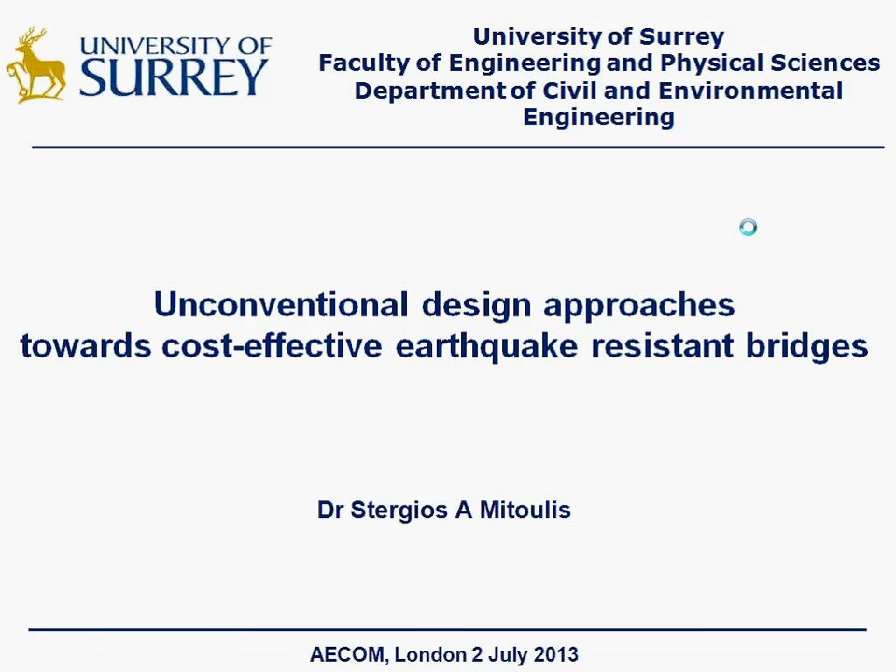Bridges are vital parts of the lifeline system, and they should maintain emergency mobility and accessibility not only in normal circumstances, but also even after severe earthquakes. Imagine what would happen if a bridge would collapse after an earthquake and ambulances don't have access to the hospitals.

Infrastructure woes take a toll on the U.S. economy. This is a Reuters article published a couple of years ago, showing the toll placed on the U.S. economy due to deficient bridges, which is a $2.7 trillion problem. In 2010, the American Society of Civil Engineers showed that deficient and deteriorating transportation systems and bridges drained $90 billion from the economy in 2010 alone.

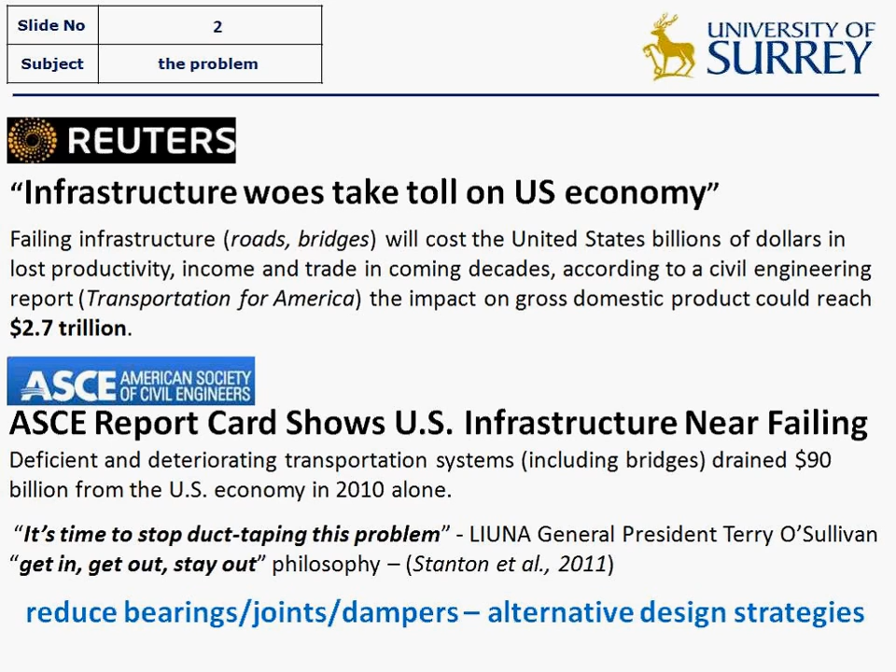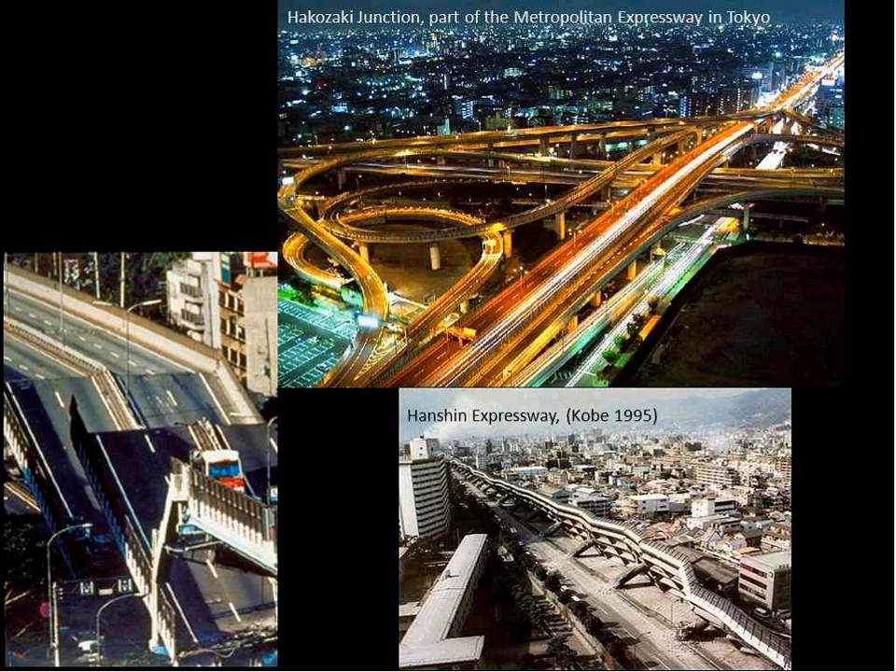You can see on the top figure the healthy system of the Hakozaki junction. On the left you can see a bridge that has experienced span unseating. On the right, one of the most famous bridge failures, the Hanshin Expressway, which totally collapsed during the 1995 Kobe earthquake.

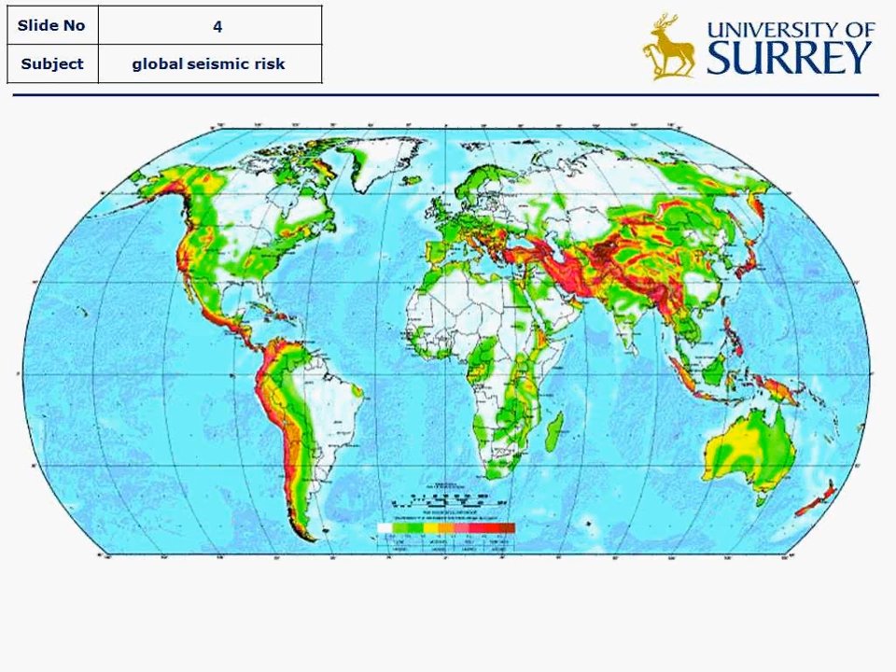causing dramatic disruptions of traffic and actually dividing the city into two isolated areas after the earthquake. This global seismic risk map shows in red the areas that experience large seismic actions. You can see this on the west side of America, in Arab countries, Southern Europe mostly, and in Southeast Asia. So what exactly is the seismic action?

Why do we have to address seismic issues in bridge design? The action is a horizontal load. In fact, it is an acceleration imposed on the structure, and this acceleration is translated into inertial loads, so the structure produces the seismic loads and loads itself by inertial loads.

This is the seismic action, which would not be dangerous at all if we didn't have constructed environments like bridges and buildings. So seismic design is required for structural design in modern building codes such as Eurocode 8, such as AASHTO that is applied in America, and Caltrans in California.

Bridges are nearly isostatic systems having low redundancy, which means that one failure may lead to collapse. Seismic events can cause catastrophic failures, endanger public safety, and have tremendous impact on economies. I showed before the collapse of the Hanshin Expressway, which is related to the impact on the economy.

Bridges are vital parts of the lifeline system that should maintain emergency mobility and accessibility even after severe circumstances such as floods, earthquakes, and extreme wind effects.

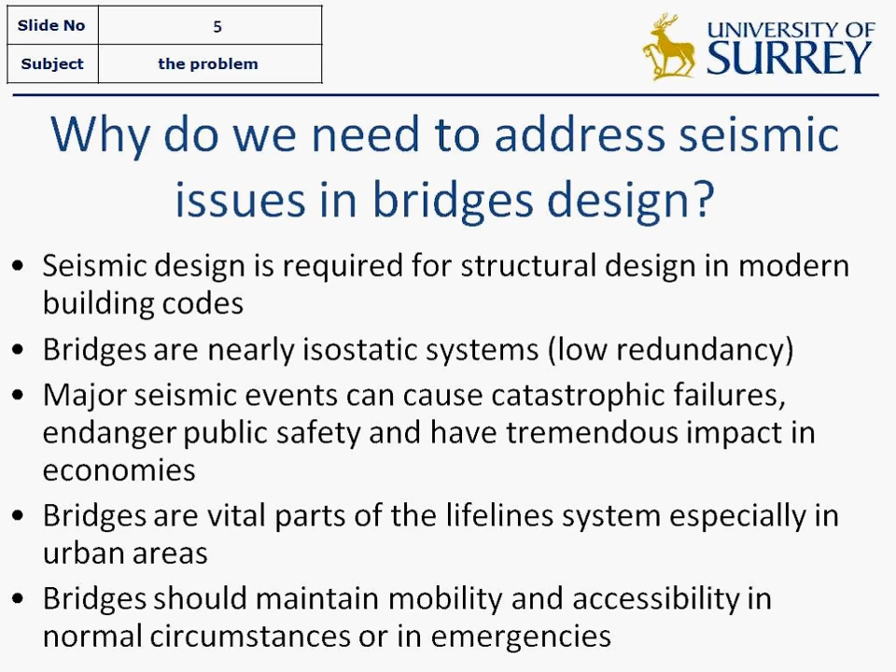So that you are acquainted with this project, this is AECOM's project in Hong Kong, built in 2010. There are many different design concepts that the bridge engineer may use when facing the problem of seismic design of bridges. In this case, seismic isolation was used, meaning the deck is supported on the piers and bearings through isolation devices and slides during thermal movements onto the piers.

The bearings receive this serviceability movement, and as such, the piers are not really loaded during the serviceability limit state of the bridge. During a quake, these devices again receive the large seismic movements and do not transmit seismic loads to the piers. But there are many different design concepts that an engineer may adopt to design a bridge against earthquakes.

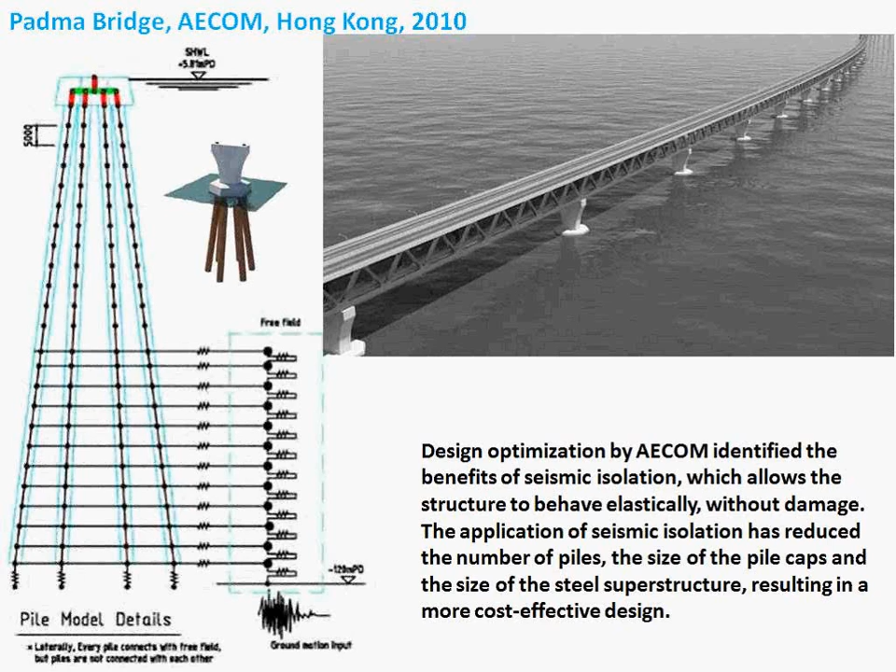So let's take the concept design of bridges against earthquakes from the beginning. You can see the structural elements of the bridge, the deck and the substructures. The substructures consist of bearings, piers, foundations, and abutments. I have divided this slide into three specific parts.

The first part is the structural elements. The second part, with the gray zones, are the design issues. And the third part is the seismic design considerations, I would say. So the deck design is usually based on construction methods.

The selection of the cross-section has to do with serviceability and prestressing, not influenced by seismic actions. We have published research in the past showing that, in fact, the deck is not affected by seismic actions, not even in bridges with rigid pier-to-deck connections.

While at the same time, bearings, one of the most important structural elements of earthquake-resistant bridges, since a bridge relies heavily on their seismic performance. At the time, we have many different types of bearings.

There are many companies producing bearings, and in most cases, application and industrial innovation went further than codes and theory. So we have to decide, when we design a bridge, about the right bearings and the correct use of isolation.

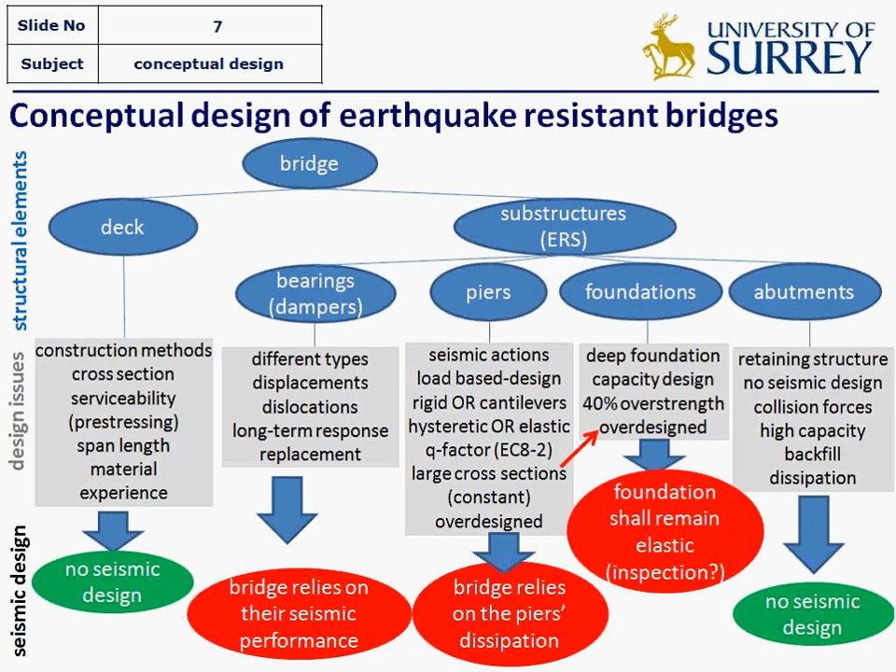So this is the initial concept. When we design a bridge, we have to have the seismic actions lower than the resistances. Bridge engineers utilize isolation devices such as viscous dampers or bearings. The damper dissipates energy through viscous behavior, and bearings dissipate energy through hysteretic behavior. We can increase the resistance, but at the same time we increase the stiffness of the bridge, which doesn't necessarily make the bridge safer than the previous design concept.

This is not straightforward in structures under dynamic loading, because the reduction in the period may cause us to attract larger seismic loads. This can also probably apply to bridges under wind effect, under wind loading.

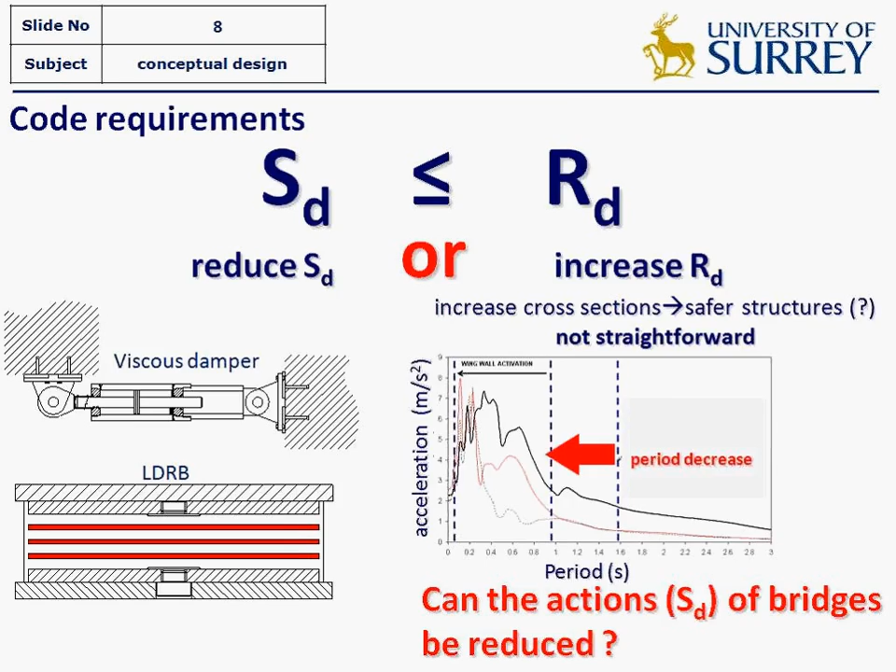The idea of isolating a bridge against seismic loads seems to be very good actually. It provides flexibility to the structure. The initial structure without isolation would have higher inertial loads from the loading. If you use isolation, the system becomes much more flexible, and the isolation reduces inertial loads rapidly. This is a great idea.

At the same time, we may also utilize bearings with high capacity, having high damping properties, high capabilities, to even further reduce the seismic load. Yes, this is a very good idea. Bearings reduce the serviceability loading of the piers, reduce the seismic loading, and increase damping. But...

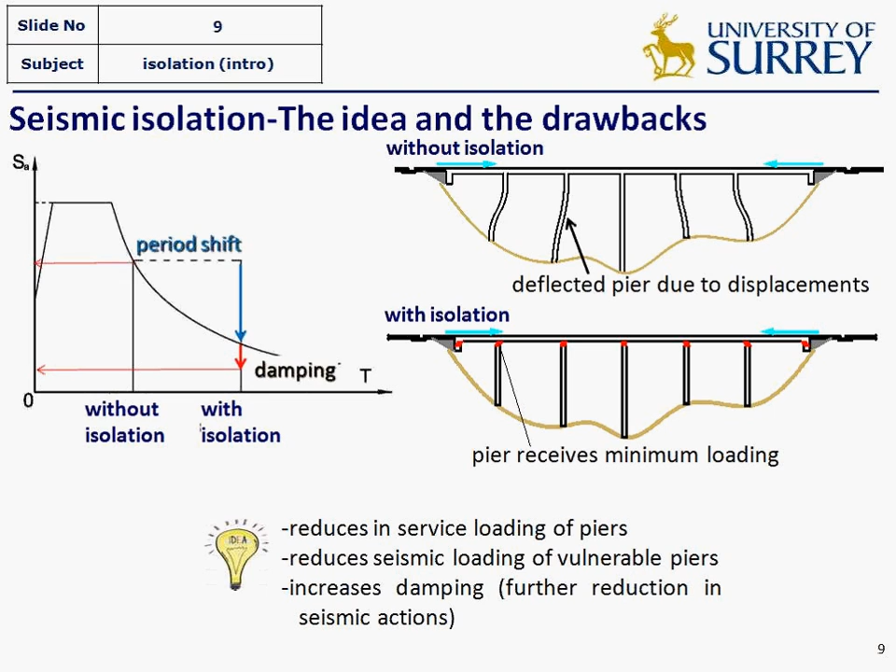A past earthquake showed that actually that was not a really good idea, because many bridges failed during the 2011 Great Tohoku earthquake in Japan. Many bearings were found to have ruptured completely through the elastomer, due to direct tension. So what happened there?

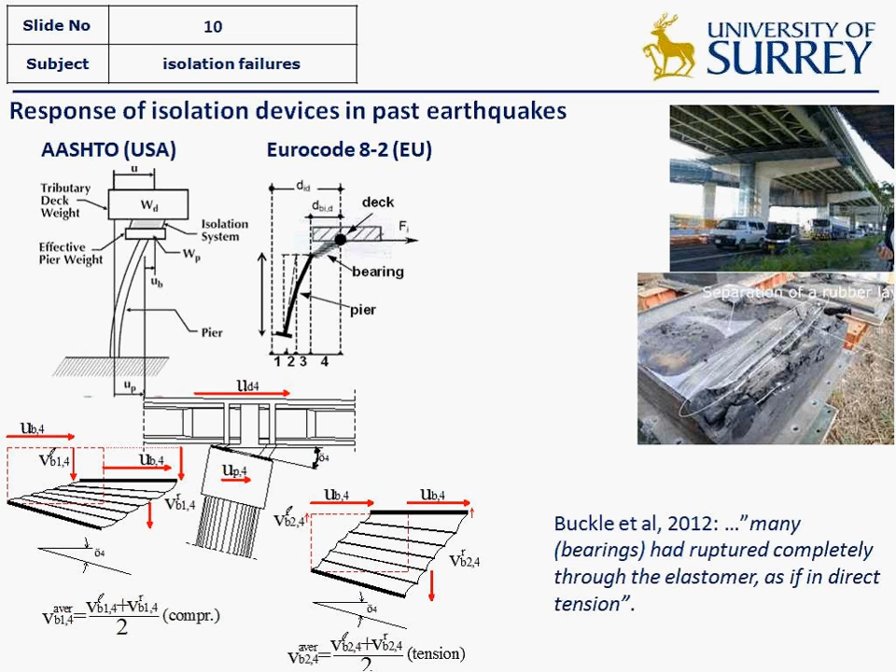A recent publication of mine in a journal showed that if we use double lines of bearings on top of the pier caps, the bearings have to receive a tensile movement. Bearings are not designed against tensile movements, they're not designed against tensile loads. So these bearings failed, and many bridges experienced span collapses.

If we think in terms of serviceability of bridges, we will see that the bearings do need replacement after some years of bridge service. An isolated bridge responds with increased displacement since it's quite flexible. And of course, isolated bridges are statically determinate bridges, and failure may lead to collapses.

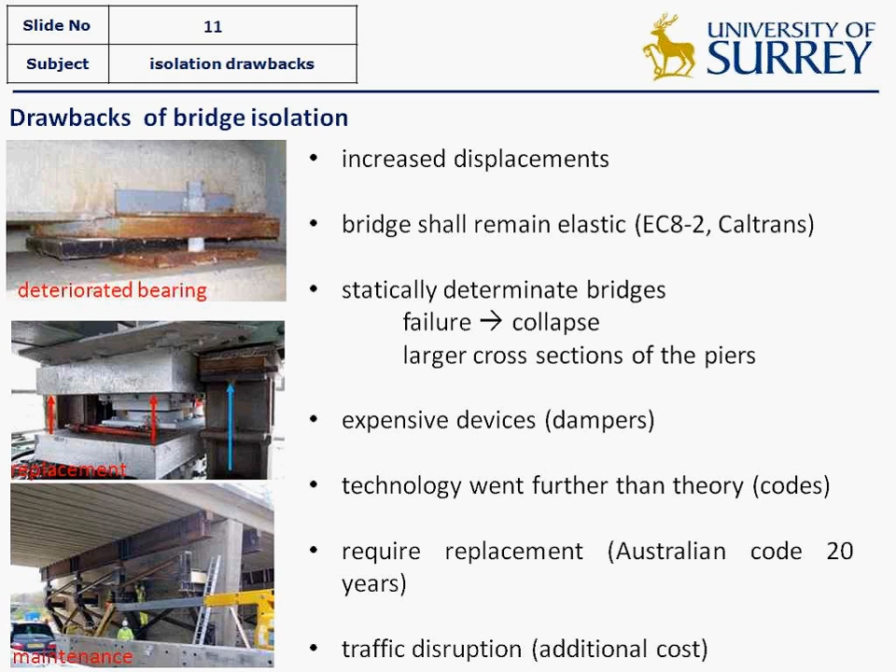These are expensive devices. Bearings are sold at very high prices because they also sell the knowledge and the experiments done in order to produce such bearings. And of course, technology went further. Design codes provide some checks against elastomeric bearings and sliding bearings, whereas at the same time the market can provide us with a few hundred different types of bearings.

So the question is, do expansion joints cause more problems than they solve?

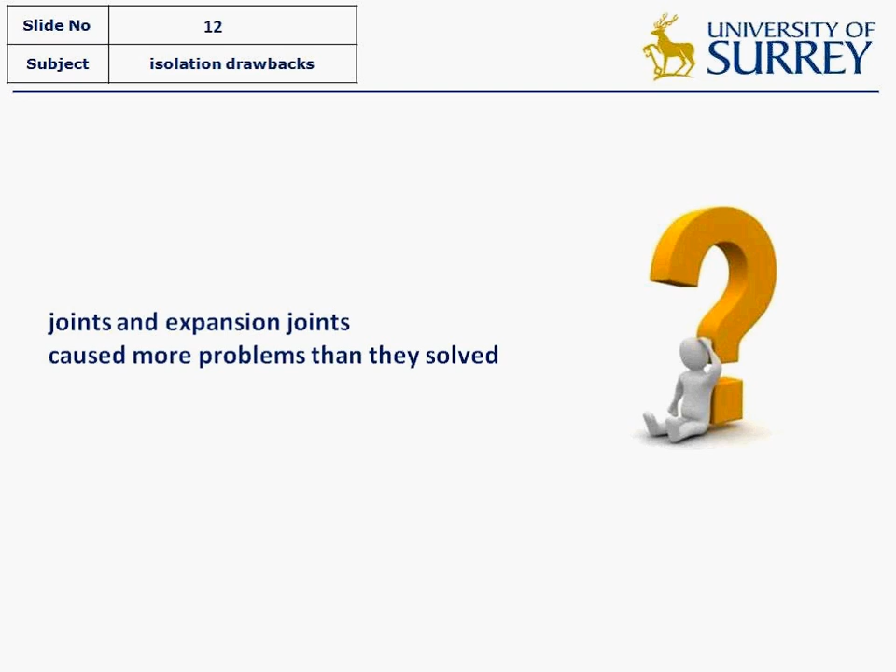Something like 10 years ago, I made a turn to the unconventional bridge design concept, and I tried to utilize earthquake-resistant abutments - elements which were not supposed to be effective and active during earthquakes. So this is the idea.

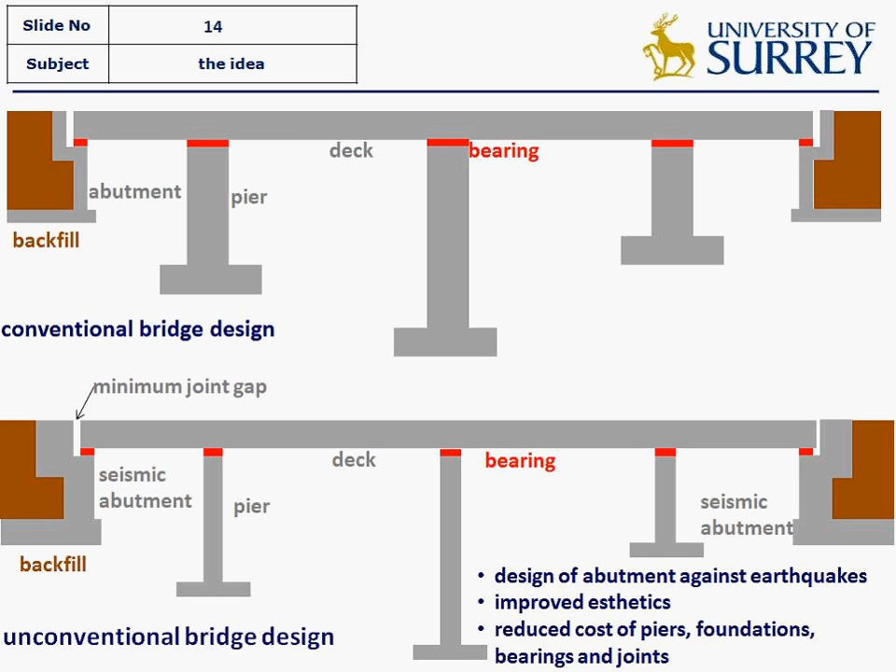This is the conventional bridge: large pier sections, large foundations, and one abutment that is in fact only retaining the backfill soil. The idea that was proposed and published several times in journals was to provide high capacity external support, horizontal support, like this abutment, and effectively reduce the pier section, the foundation design, and of course reduce the use of bearings.

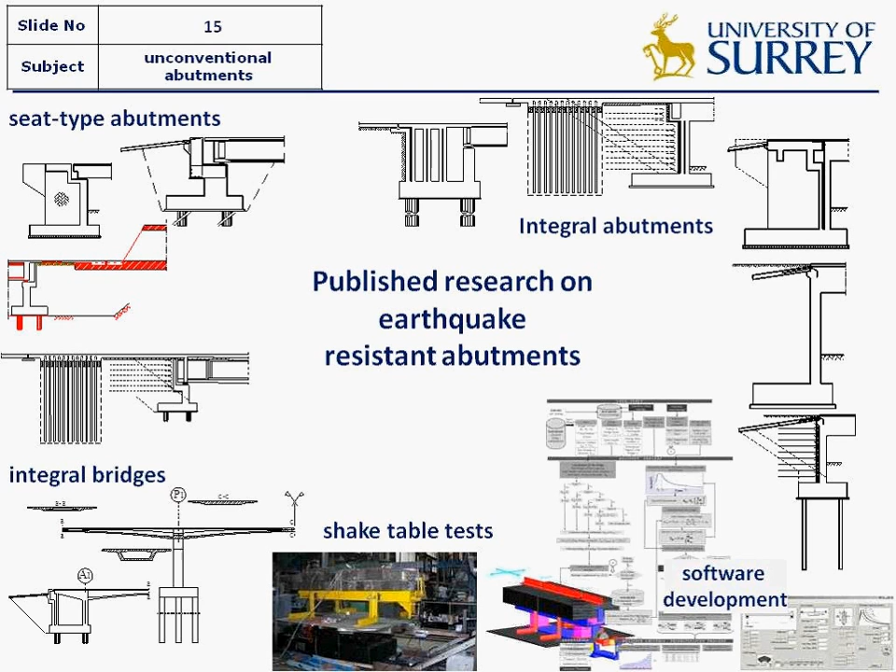So how are abutments being treated in Eurocode or in other American codes like AASHTO? If we use a seat-type abutment, then the abutments are not considered to contribute to the seismic action. If we use integral abutment, Eurocode 8 Part 2 requires that the behavior factor Q equals 1.5 shall be used. This behavior factor, which corresponds to the American R factor, shows how much of the induced seismic energy can be dissipated by concrete sections, by the piers.

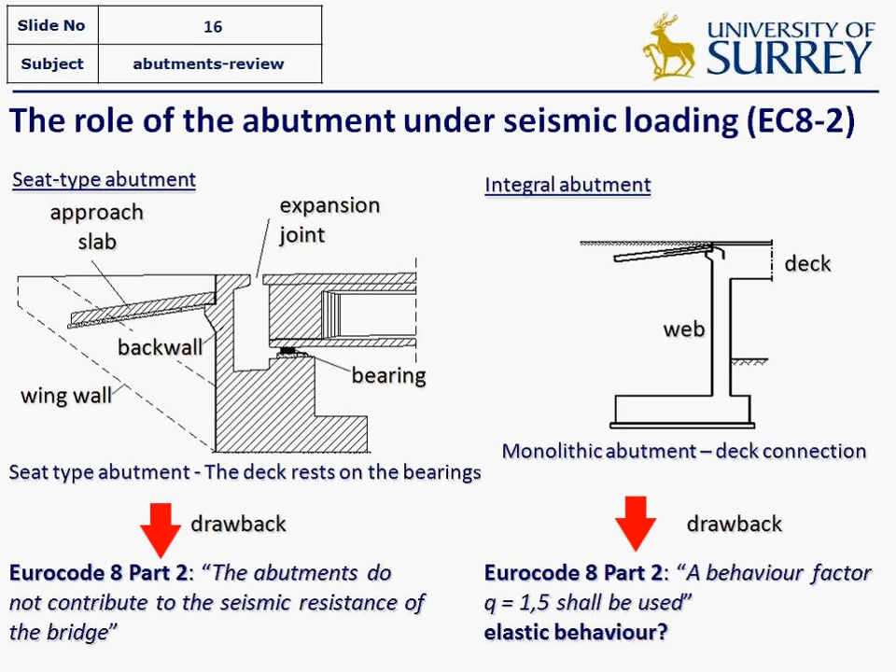So if that factor is close to 1, that means that the structure shall remain elastic. So we use integral abutment bridges. If we design integral abutment bridges, the bridge shall remain elastic, even though the piers are connected rigidly to the deck. This is the philosophy. They utilize either integral abutments, and Caltrans provides an equation for the calculation of the

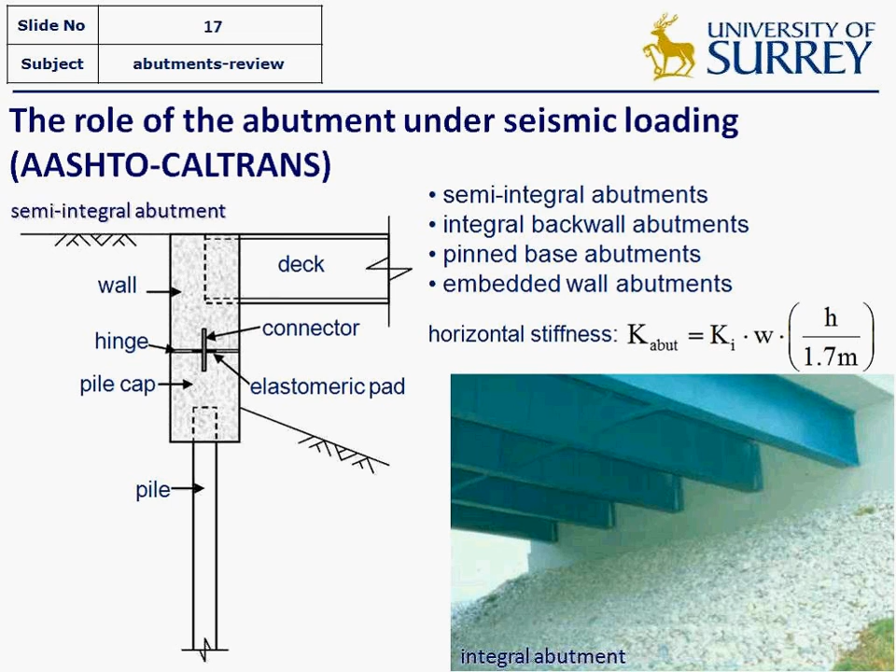horizontal stiffness of the abutment plus the backfill soil. And there have been quite a few studies on the semi-integral abutment concept, which is a stub-type abutment that is connected through a connector, which is in fact a hinge, to the pile cap and the piles, and this hinge in fact reduces effectively the bending moments of the piles, so piles are not susceptible to fatigue loads, mostly to fatigue loads like bending loads and constrained movements and constrained shear stresses.

What is the requirement of Eurocode for the expansion joints? This is the expansion joint, the gap between the deck and the back wall. This wall is called back wall. This expansion joint has to take into account, of course, permanent movements due to creep, and has to take into account 50%, this is 0.5 according to Eurocode 1, multiplied by the gradient of the uniform temperature gradient.

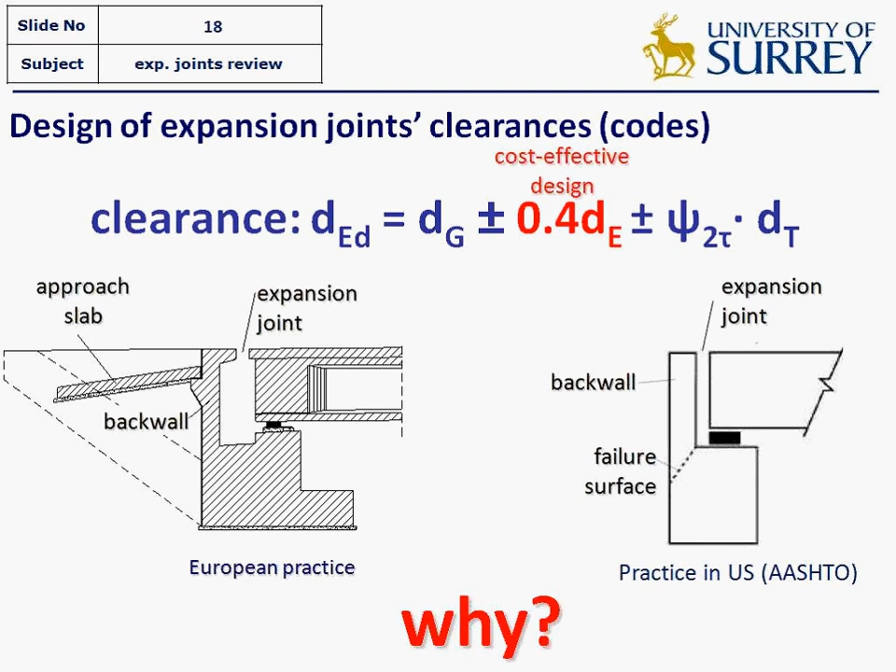This joint also has to take into account 40% of the seismic movement, 40%, and not the whole seismic movement. If we design expansion joints against a total seismic movement, then probably the expansion joint calculation will show that we'll need something like 300 millimeters of expansion joints, which are very, very expensive, and these joints should be replaced several times during the life of the bridge, which means that the cost of the bridge will be increased rapidly due to the need for replacement of these devices.

So the result of the poor design, 1990 Costa Rica earthquake: the deck pounded on the abutment, no provision for this collision effect was taken into account during the design, and so we had a tremendously rotated abutment, which of course cannot be retrofitted, and there are some slight damages in past earthquakes from pounding-induced failure of the expansion joints. You can see here that the bridge might allow traffic access, but the expansion joints would not allow emergency vehicles onto the bridge.

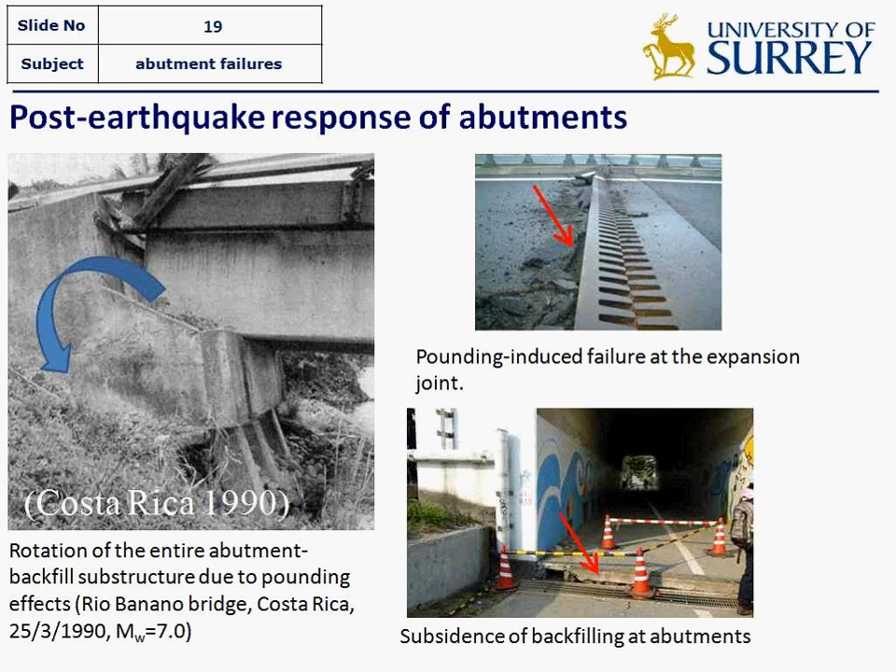Can these effects be modeled in practice with finite element software? You can see here that of course we can model such effects. For example, this is a Plaxis model that was modeling such pounding force on an abutment with surface foundation. The model was verified by the SAP model, this is a SAP 2000 model, a software provided by Berkeley University. The final result for the permanent movement, the residual wall movement, was up to 262 millimeters, which means that the bridge is not accessible.

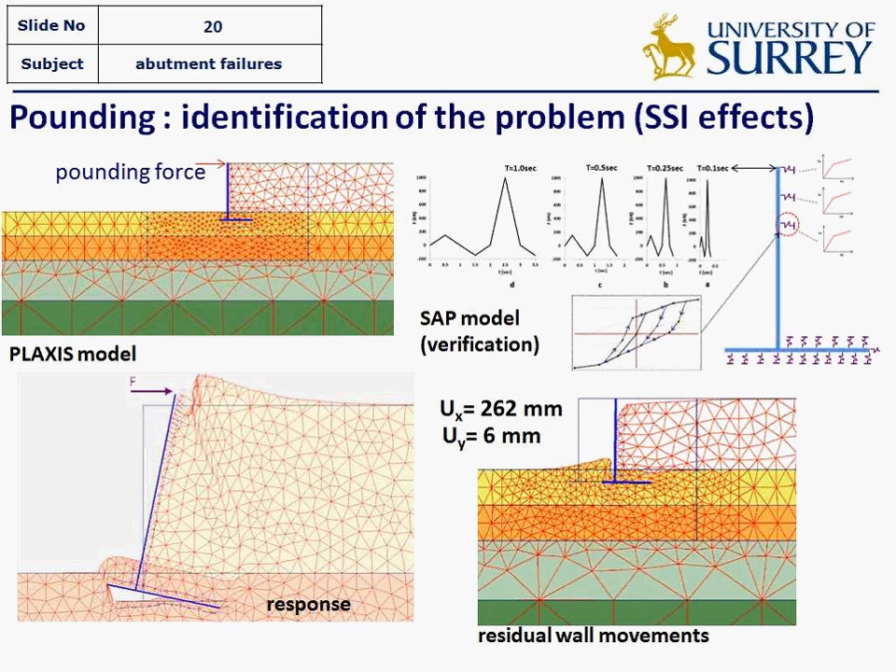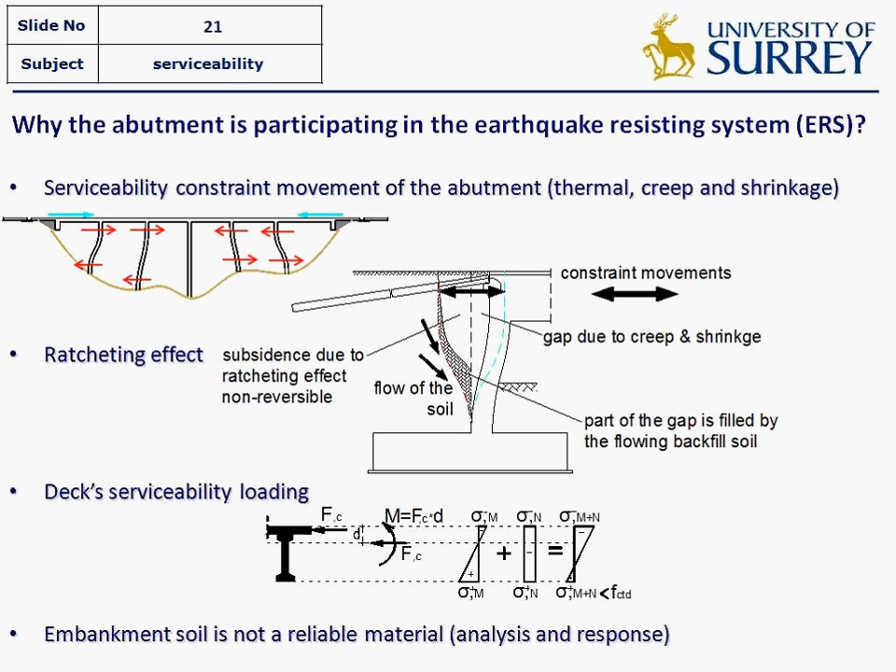So abutment and the backfill soil are not considered in the earthquake-resistant system of the bridge. There are several serviceability related issues, such as the constrained movements of the abutment, the ratcheting effect that has been addressed in the past by Virginia University, and the deck serviceability loading that was published several times by our team back in my previous university, Aristotle University. And of course, the embankment soil is not a reliable material. Who is going to design a bridge relying on the resistance of the backfill soil?

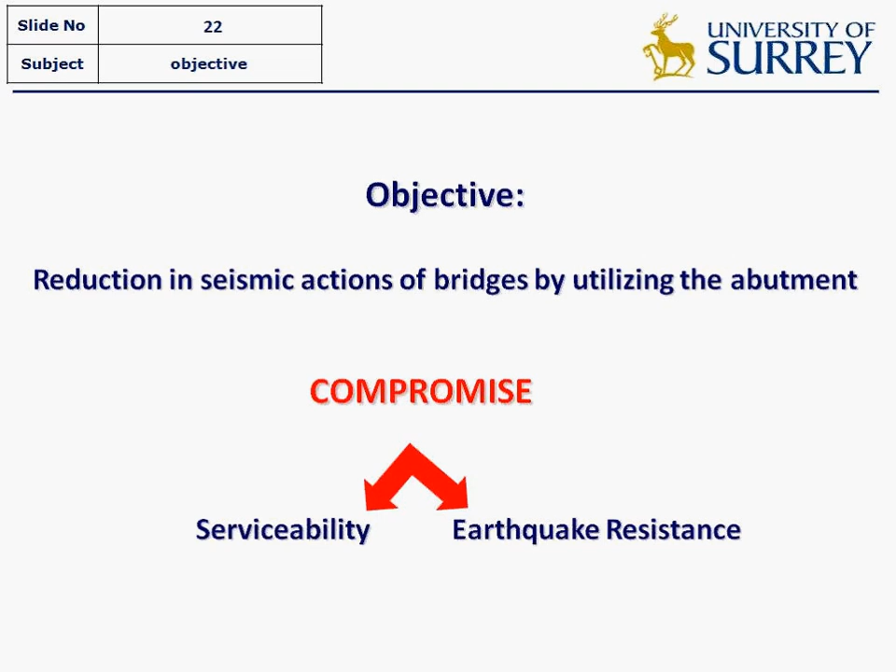The initial thought when designing an earthquake-resistant bridge that will incorporate the abutment and the backfill soil into the lateral resisting system was to compromise between serviceability and earthquake resistance. Serviceability requires flexibility, and earthquake resistance requires high capacity.

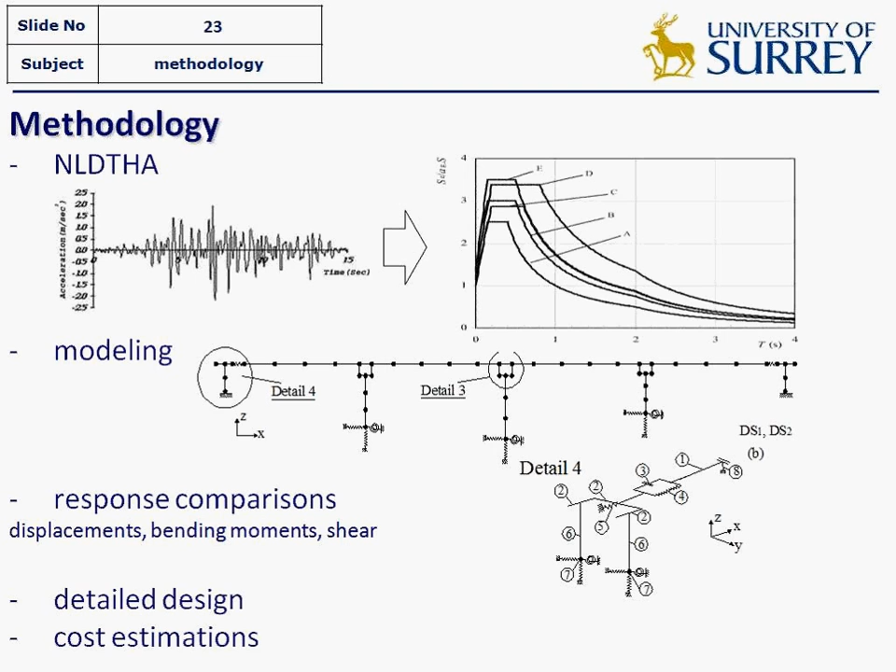The methodology, of course, is the typical methodology for designing and analyzing bridges against earthquakes: non-linear dynamic time history analysis, with accelerograms reduced to Eurocode 8 Part 1 response spectra, detailed modeling of the dynamic system, and comparisons in terms of displacements, bending moments, and shear actions of bridges to see if the new, unconventional concept is efficient.

So it was utilized only the conventional seat-type abutment. Nothing was done differently from the typical design.

Except the expansion joints. The expansion joints in that case did not take into account seismic movements, so the deck was interacting with this abutment. Displacements between the typical case, the bridge with the large expansion joint, and the conventional bridge with a small expansion joint, were compared in terms of deck displacements.

What we found was that when the abutment participates in the earthquake motion, the bending moments may be reduced by up to 25%, which means we can design the piers with smaller cross sections, and we can effectively reduce the cost of both the piers and the foundations.

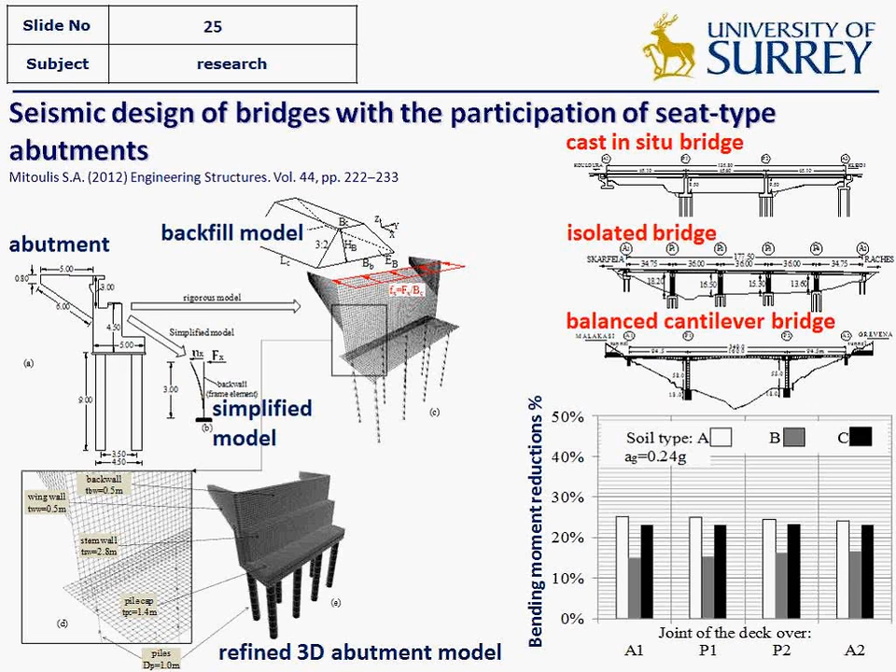We provide an expansion joint between the deck and the back wall, but the magnitude of this gap is much smaller than the typical one that the code requires. So there's an interaction between the deck and the abutment, and further to that, the backfill soil is activated because the back wall moves towards the backfill soil. That was the idea: to involve the abutment into the seismic problem.

Having recognized that displacements and the bending moments of the piers are reduced due to this interaction, the back wall was strengthened. Let's see what happens if the back wall is a high capacity external shear key, a high capacity external support, having a thickness of up to 1 to 1.5 meters.

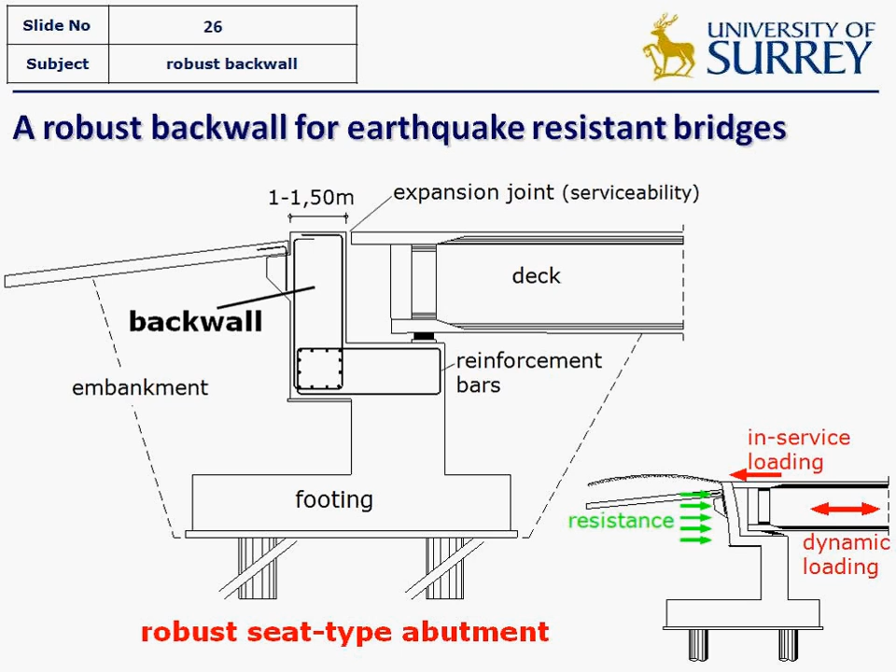So we did some analysis. I'm not going to go through the analysis with MATLAB, but the fact was that the displacements were further reduced, up to 40%.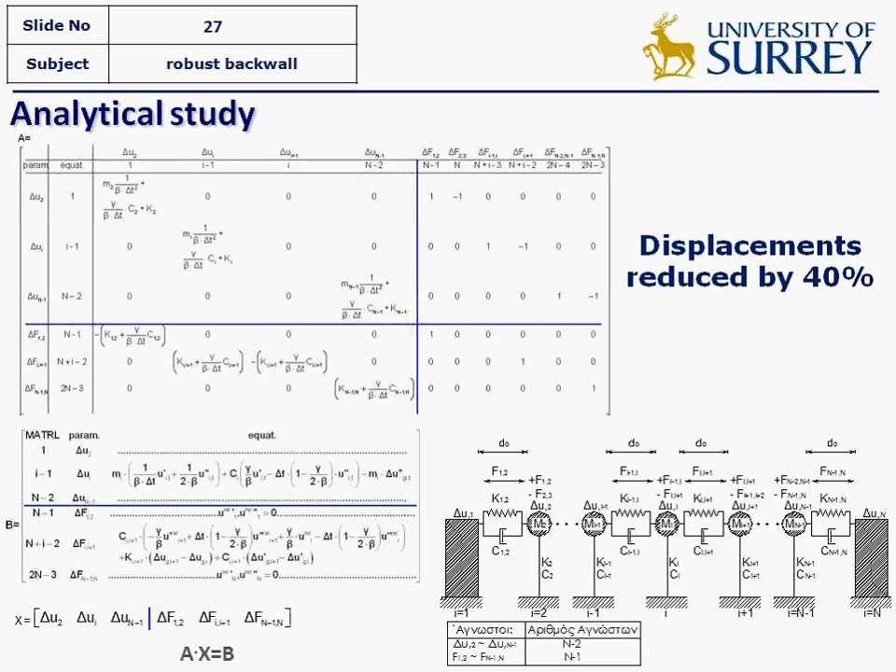Then we shed more light on the unexploited process of the backfill soil, and we extended the deck slab of the bridge towards the backfill soil. What was done after that was to restrain this slab, this continuity slab, into the backfill soil.

These piles combine flexibility with earthquake resistance. Why? Because the piles have quite small cross sections, so they are quite flexible, and at the same time we can also utilize expanded polystyrene layers just below the pile cap of the piles in order to increase flexibility of the piles to receive serviceability movements due to thermal effects.

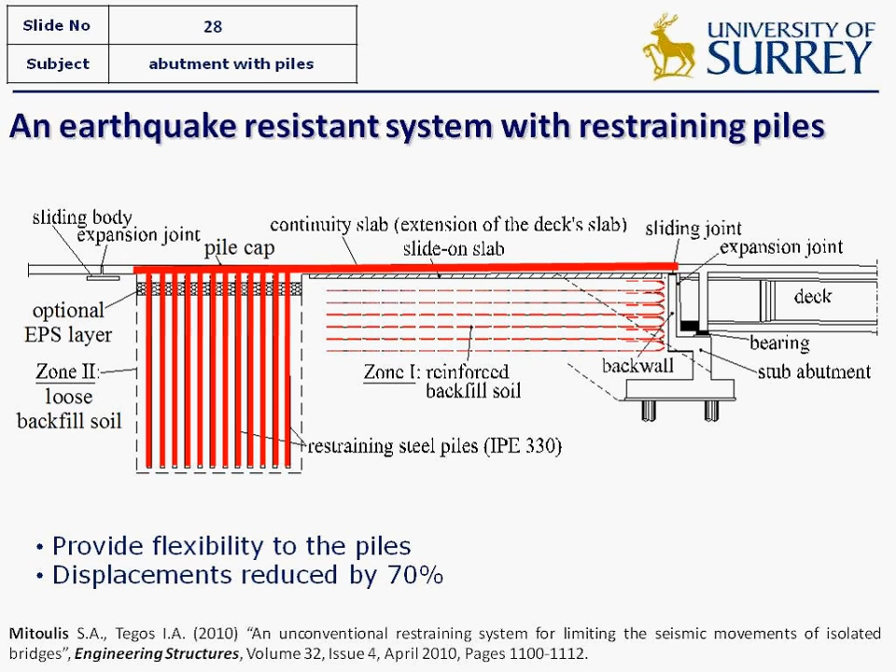During earthquake, it is tied to the backfill soil, and as such, the displacements were found to be reduced by up to 70%. This is a tremendous reduction in seismic movements, which means the piers might be very slender, and the level of safety of the bridge remains essentially the same, since both the conventional and unconventional bridges were designed according to Eurocode 8 Part 2.

Then the idea evolved into an external stopper. We said, okay, the backfill soil is not a reliable material, so we have to provide very specific properties of the backfill soil in order to utilize it.

So we said, okay, there are many bridges that are adjacent to tunnels, so let's tie this bridge to the adjacent tunnel. This was provided through an extended shear key having a quite large volume, and you can see here the shear key actually restraining the movements of the deck, both longitudinal and transverse, during earthquakes.

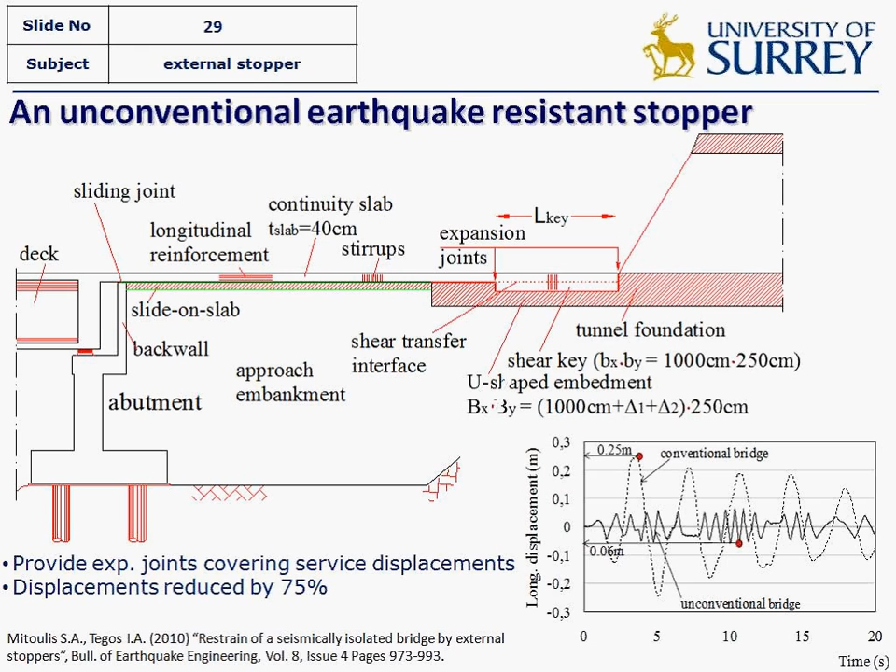You can see here the response time history analysis of the deck, and of course this shear key has to take into account thermal movements. Expansion joints were left between the shear key and the foundation of the tunnel in order to provide space for the movement of the deck. The displacements were found to be reduced 75%, and this key can be utilized not only in case a tunnel is adjacent to the bridge, but a concrete structure may be designed there in order to restrain seismic movement. So there are many different ways which are very helpful to avoid extensive use of bearings and large cross-sections for the piers.

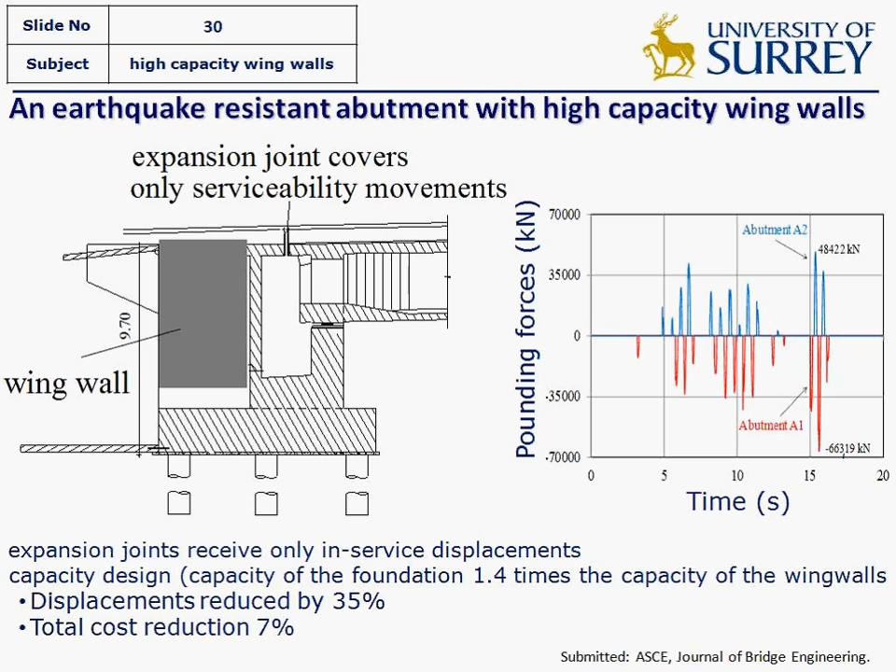It was another idea that was published in the Journal of American Society of Civil Engineers, Journal of Bridge Engineering. We control the pounding forces. The deck actually collides on these high-capacity wing walls. The wing walls were strengthened in that case, and the wing walls transfer the seismic load to the foundation of the abutment. Additional measures were provided to avoid sliding of this foundation. Displacements were reduced up to 35%. It is underlined that this bridge was a quite heavy bridge, a railway bridge, and the initial concept for the design was to apply a combination of high damping rubber bearings and viscous dampers. So the conventional design with dampers was compared, and still the displacements were reduced up to 35%.

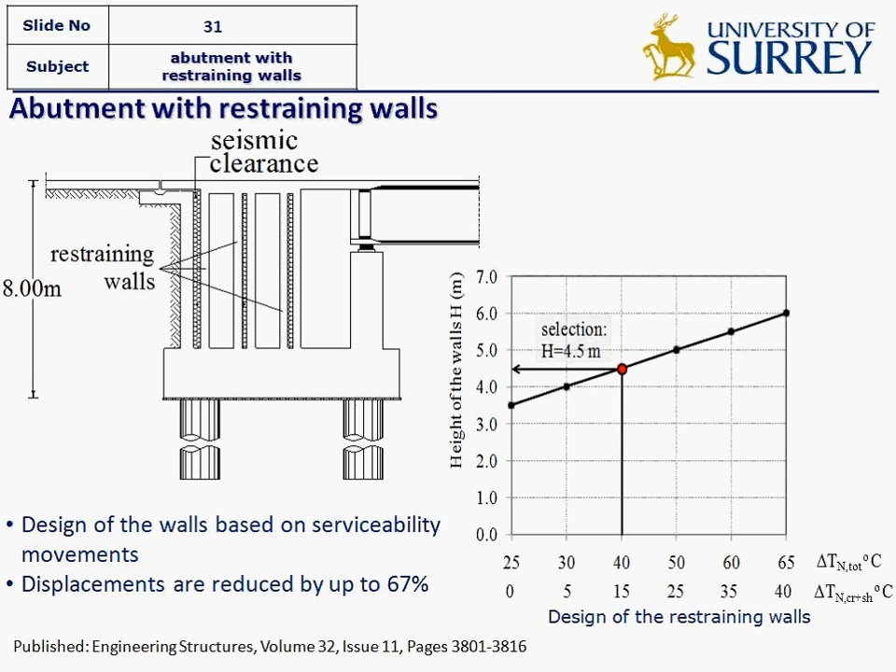If we want to control the dissipation through elements, we can utilize restraining walls. Of course, we have to optimize the design procedure, as these walls are expected to receive serviceability movement, and they should remain elastic during the bridge service, while responding in an inelastic manner during earthquakes. In that case, displacements were reduced up to 67% when the stiffness and hysteretic behavior of these restraining walls was taken into account.

So the concept can be applied also in case we want to retrofit or strengthen a bridge against seismic loads. In that case, the measures are even more effective due to the fact that we don't have to take into account creep and shrinkage effects. Creep and shrinkage effects have already been developed during the first 2 or 3 years of the bridge service, and then we can close the expansion joints with very small expansion joints, so the bridge may interact with an external system restraining the seismic movements effectively.

At the time, most of these bridges had simply supported spans, which means that there are expansion joints over each pier. So in that case, it was considered essential to connect the adjacent spans. A cast in situ concrete slab was utilized to connect the slab of the adjacent spans, and at the same time, a cable restrainer was utilized to connect the adjacent I-beams, the pre-stressed beams. This cable restrainer was installed at the level of the center of gravity of the deck cross-section in order to avoid secondary bending moments. So it was found, after analyzing this quite old bridge built back in 1986, that these measures were adequate for the additional seismic loads.

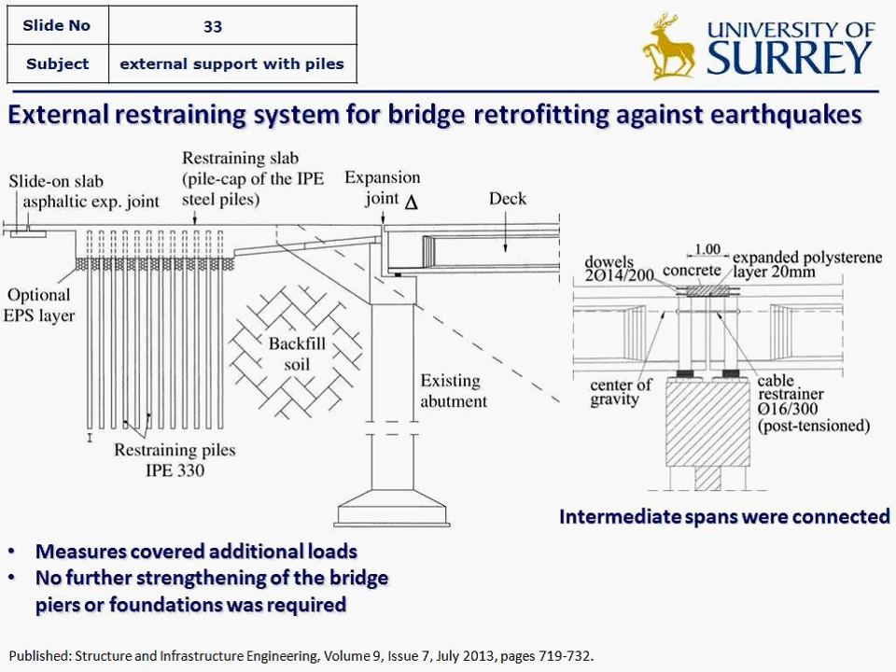So the bridge is considered to be... when the bridge was checked against the Eurocode 8 Part 2 design provisions, the bridge was found to be adequate to receive the seismic loads.

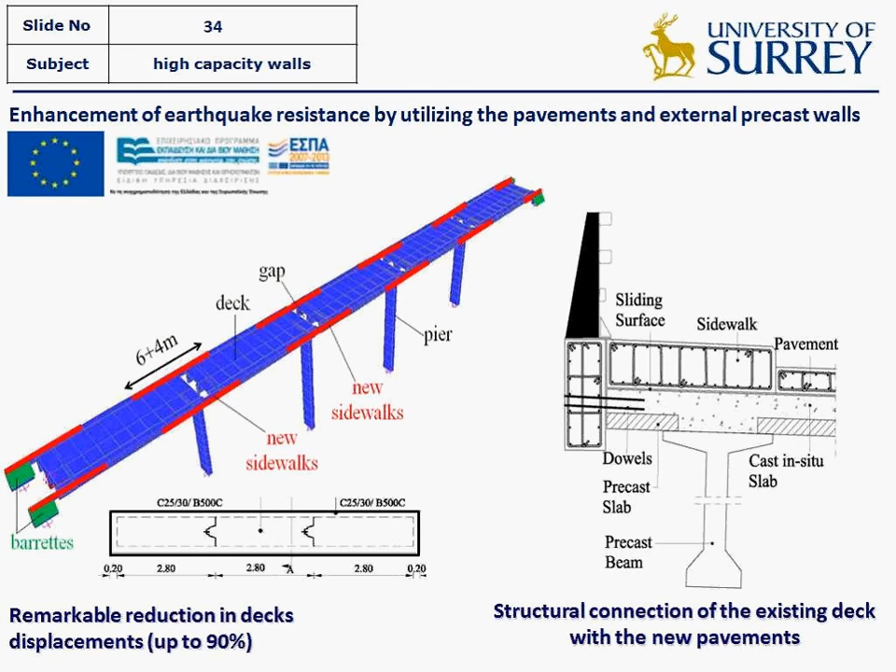If we want to avoid disrupting traffic, we can apply different measures, such as the ones I'm showing here. So instead of utilizing piles, we can use external bored walls, shown here with a green color, and connect the adjacent spans by these red lines you can see in the model. Those are new sidewalks, and you can see here the intervention on the sidewalk. So part of the sidewalk was replaced. A cast in situ part of the slab, appropriately reinforced, was utilized, and the new elements, the horizontal one and the vertical one, were connected through dowels with the existing part of the slab. So, as you can see, the middle part of the bridge is accessible, and the bridge was retrofitted without disrupting or closing off the road.